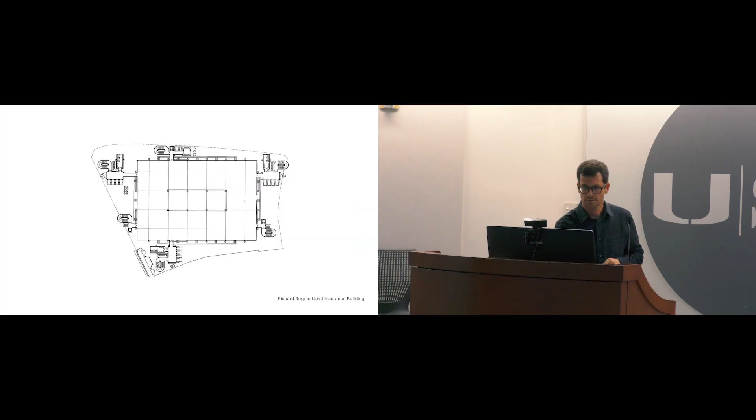Now, this is a project, probably you know Richard Rogers, the Lloyd's Insurance building, which we like a lot. When you look at it, you see it has a really clear structure, which we like very much. And then he's taking out all the elements which might, let's call it, destroy the ground floor. And this is something we also tried to do here, because we were quite limited in terms of the dimension of the plot. We said, okay, in terms of sufficiency, we want to do as many apartments as possible and make them as little as possible.

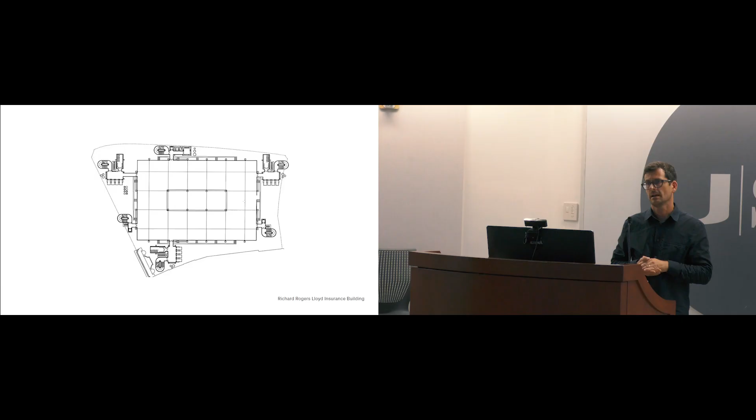And so finally, I go to the next one here, we decided to make 8 duplex apartments. So they have 2 stories each. In the first 2 floors, we have 4 in a row. And then on the second floor, we have another 4. And now, why did we take out everything? First of all, we were interested in having a rigid structure. So we could build 8 times exactly the same floor plan, which was very good for the cost, but also helped us to have a strong concept.

And then, secondly, to take out all the elements which don't have to be heated. We don't need a warm elevator. We don't need a warm stair, and we don't need any circulation spaces. These are all the things we added on the main volume, and somehow the volume became much smaller, and with these additional elements, it started to connect with the surroundings.

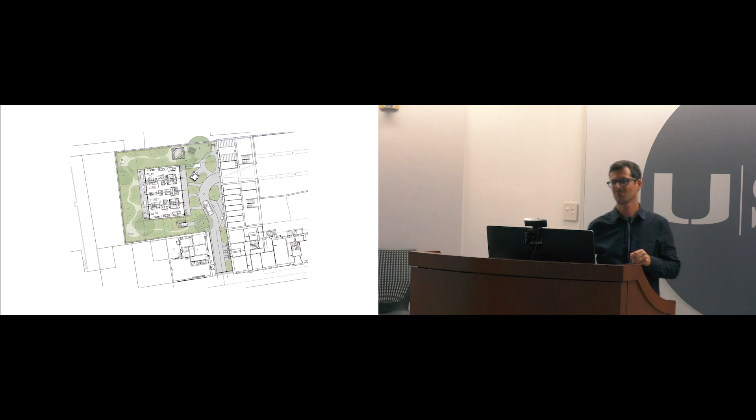And then you see here the entrances to the different apartments, the access to the stair for the second level, and the elevator in the back. Here, finally, we have a ramp for the wheelchairs. And it's quite interesting what happens. Not many people go back there. Maybe there are some crazy architects who want to knock on every wall. They go there, you know. But every, let's say normal person, wouldn't go further than this point here because you feel it's too much privacy.

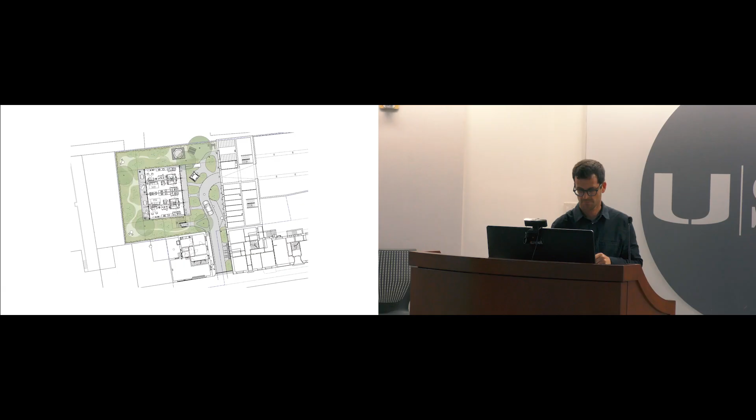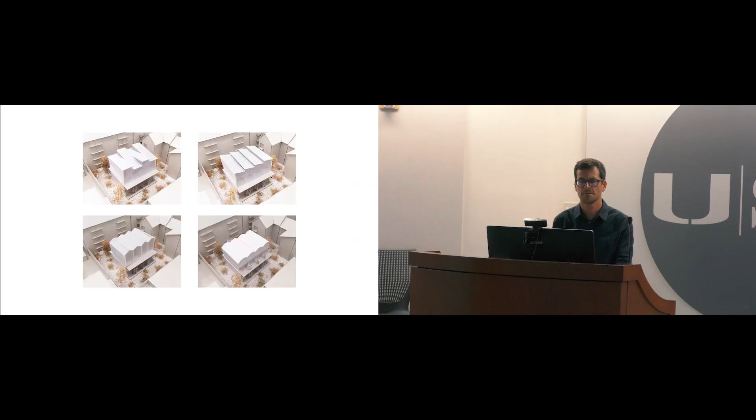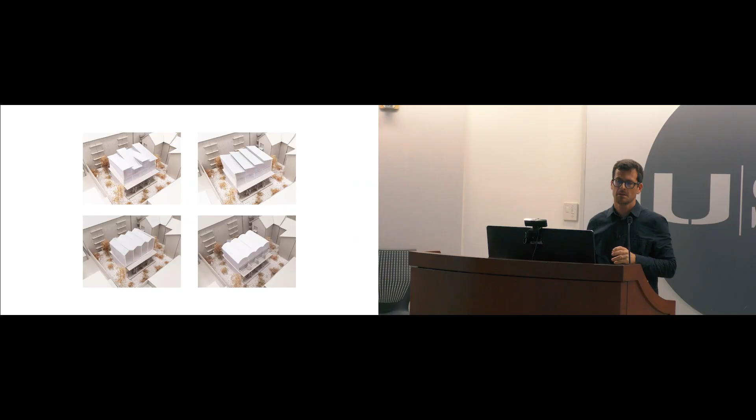So here you can see different model studies. Fabio and me, we still work a lot with models. We love 3D, we do all these things, but for us to develop it, and also for the clients to have something to look at, to touch, to walk around, the model is still a very good element to develop a project.

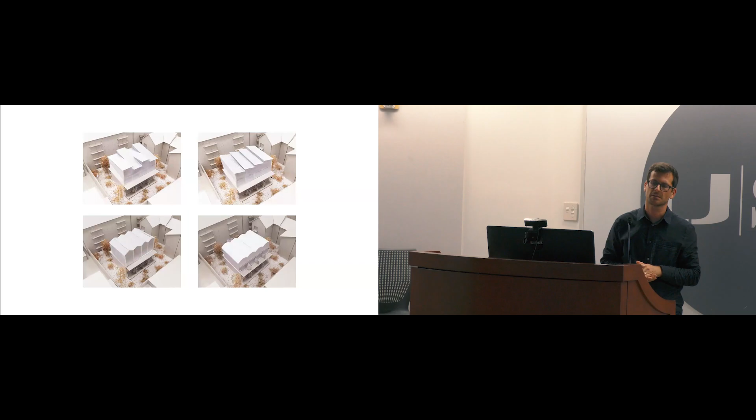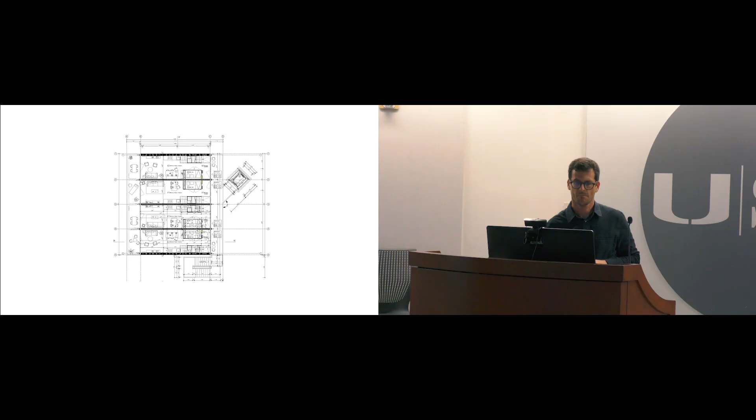Now let's go to the ground floors. As you see here, the four same floor plans, they're always mirrored, two and two together. And the elevator or the stair brings you up to the second floor, and to the back. I go quite quickly through because I have a closer detail to explain everything. And this is the upper floor of the apartment. So now let's see the detail.

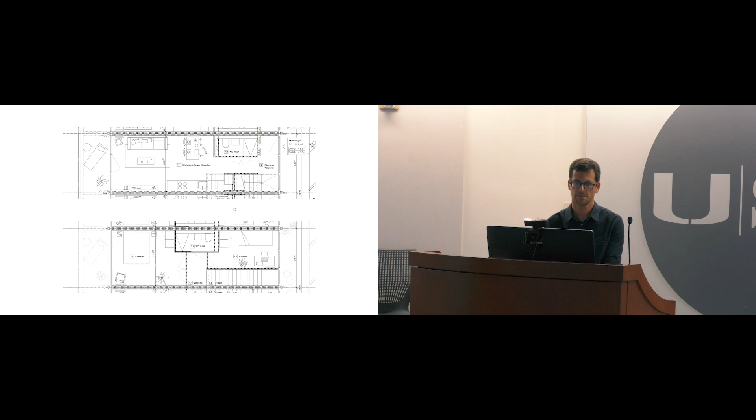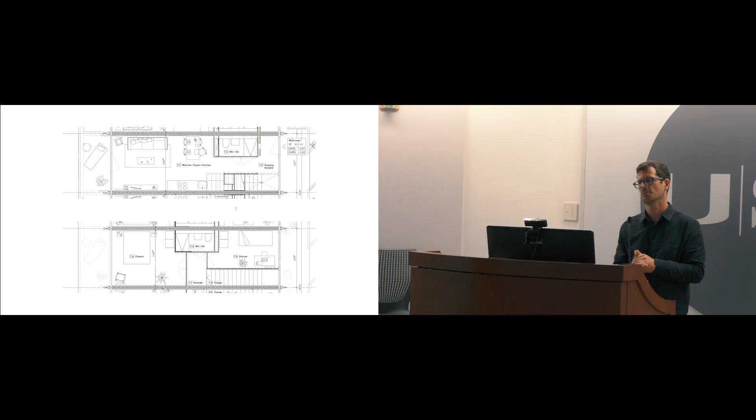To be honest, it was quite a challenge to build such a small apartment because, as you probably know also here, there are so many regulations you have to follow, and so on. But let's go through. So you start your duplex flat in a small place here. You have a small entrance area, a wardrobe, and then you have a wooden box where the toilet is.

And this is already one main topic, because in terms of regulation, they need us to make a toilet which is accessible per wheelchair. But this one was totally not, it was too small. And there would have been no chance for us to build this big toilet in this ground floor. So we found a solution, which we think is very nicely done, because we have a double door here on the toilet, and when you open both doors, they close to the wall of the stair here, and you reach the dimension of the toilet which you need.

And so this detail shows you how we work with the laws, how we try to find solutions to get the best out of it. From there now, you can walk behind the stairs, and behind the stairs there's a small kitchen. It's a bit covered from the entrance, and then further on you have an eating table and a living room. And in the back, you have the outdoor space. And the good thing is, with this box here in front and the stair, even if people walk through, you're totally private in here. And that works really well.

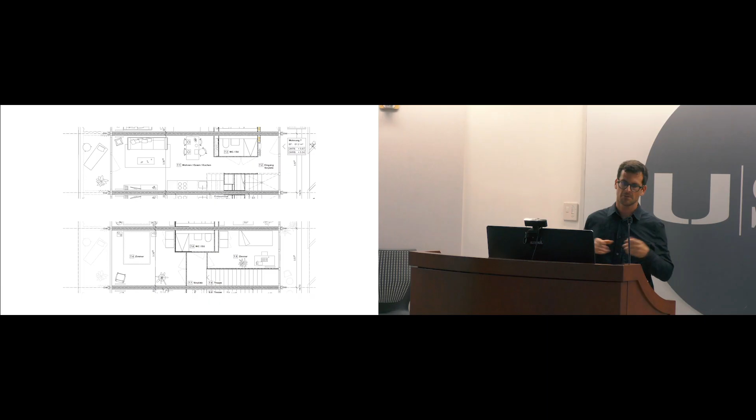Then when we move up here, we have the stair leading up here. You come to the upper floor. So here we have a double space, which gives some generosity. And you enter, you have two sleeping rooms, kind of a master bedroom, where you have a double door, which also generates some nice views to the whole flat. You have a smaller sleeping room, and you have a bathroom.

This is the section. As I said before, these walls are really important. You will see further on. We kept everything from the former use as a garage on the wall. Sometimes there are paintings, sometimes there are old tiles, you know, and we left everything because it's part of the history. We wanted to show what happened there, and we bring in just a new layer. We don't want to hide it. And this is what interested us.

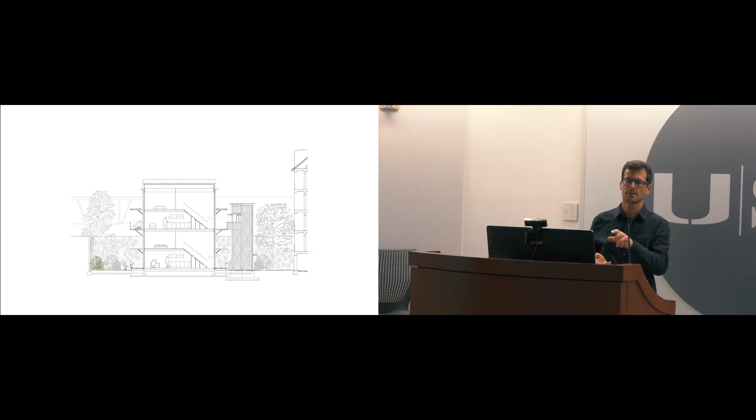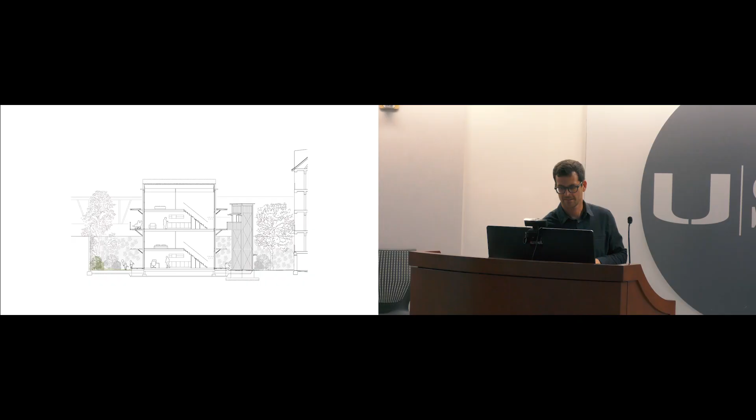Then another thing, which is quite visible, we do not have a cellar in this house. We just have small foundations, because as we also transform the existing building in front, they have a big cellar there. We said, okay, let's reduce the volume. Don't make any unnecessary cellars. Just put all the installation we can to the front house. And the garage and the storage room are in this building here. There's an old garage which is not used anymore, so we could use it.

When we move into the interior, like you saw in the first image of this shelter for the animals, these are also raw materials. And we like that very much, to have an honest way of designing, honest ways of construction, just showing the concrete slabs, the wooden walls we put inside, the windows. And what is very special here, we had an idea of doing all the installation not in the wall, but on top of the walls.

For our project leader, who was also doing the construction site, it was a lot of work because he had to measure everything in great detail. It was a lot of work. But finally, in case they have to change something, you never know with the life cycle of these elements, it's very simple to adapt the building to new questions.

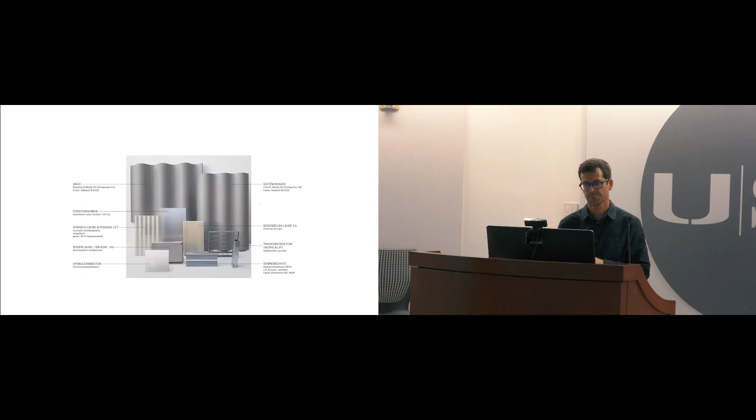Now let's move to the outside. What we followed inside, we also used on the outside. These raw materials: we had galvanized steel, which we used very visibly, and this is helping us to show the inner structure on the outside also. We have these fiber cement plates, which we clad on the facades. We have aluminium windows and wooden planks on the balconies.

And we heard stories that they never use the curtains. And they go even so far that when they have friends or guests for eating, they share their furniture. They just ask them and they use it. It's perfect.

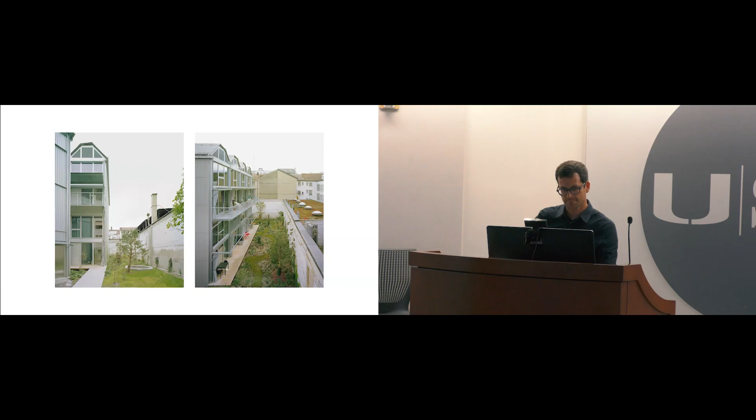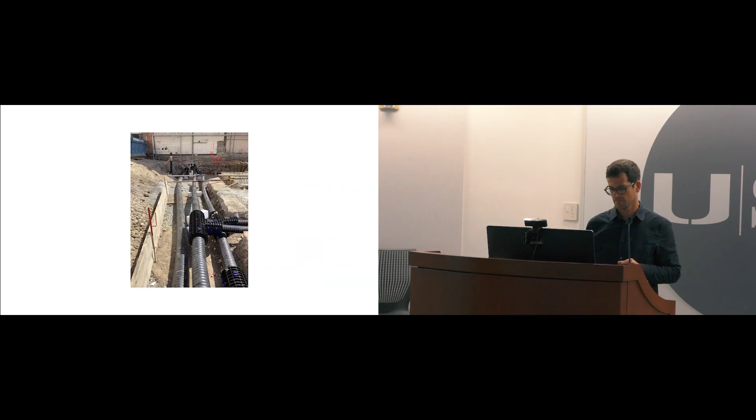Now a few pictures of the construction. First of all, demolishing the existing car garage. These are the installations from the neighbor building. Here in the back, you see the piles which we left. The foundations for each structural wall. And here you see, these are the old garages. Now the apartments have a storage room in this garage.

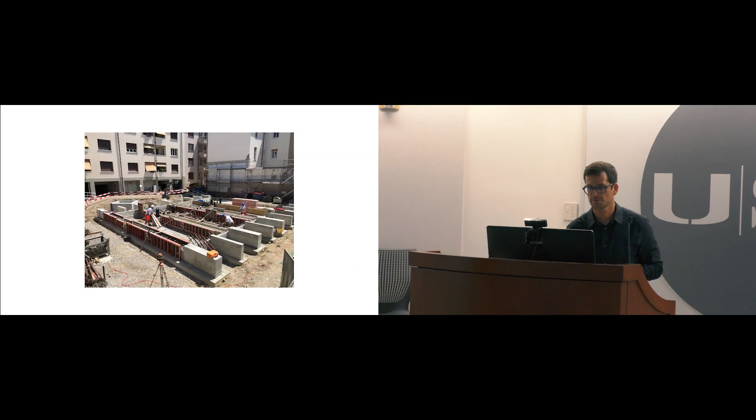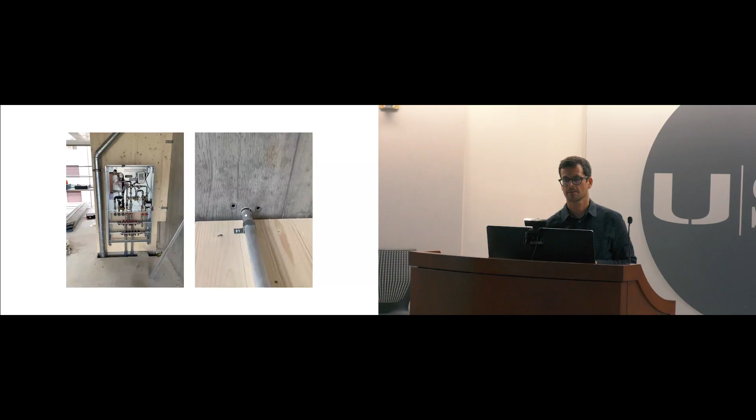So now you can imagine what kind of work it was to measure everything inside, super precise, because before you put this wall, you had to do the ceiling, you had to measure in everything so that finally it works here. And this is the backyard, the green courtyard.

The next project I would talk about is one of our first projects. It's a project that came from Fabio's family. His father and his mother asked us. It's a long story. We started with a typical Swiss box, very minimalized. And then there was some crisis in terms of the housing crisis. So we stopped it. And looking back, probably it was the best thing that could happen for us because of that stop. We started with a really small project. We made a bathroom transformation, and we could really find our own way of designing architecture.

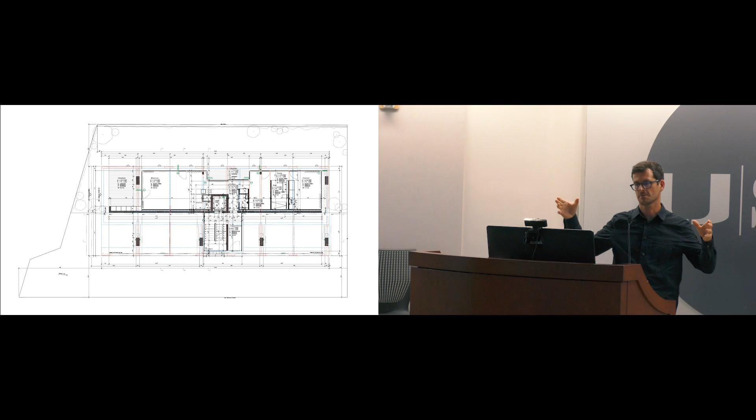And as I said before, we're really interested in reading the building and construction law very well. So we found the passage that said: whenever you take these car parking volumes, which are not the main volume but a side volume, and put them into the main volume, you can increase your main volume by a certain amount of square meters. And this idea was initial for the whole project. And from there on, everything came together, not simply, but it came together very well. Let's call it like that.

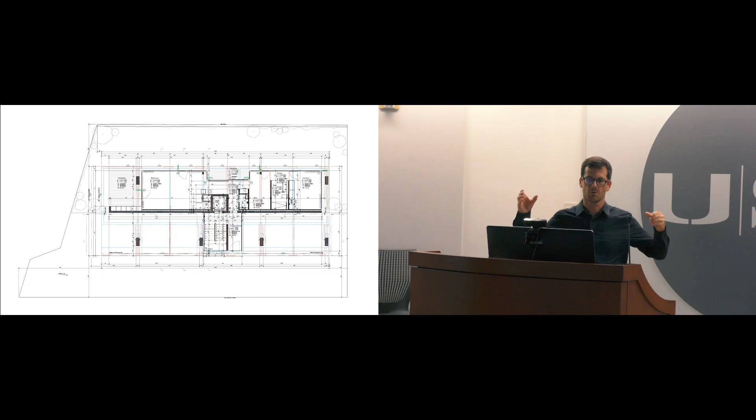Because we decided to have a public parking under the building here, all the parkings here. And then behind the parking, we had a really massive wall. Behind it, we had a private apartment. It's almost a loft apartment. You have a view through the whole apartment. And again, here we have a wall which makes it private, and it's a very nice space in here.

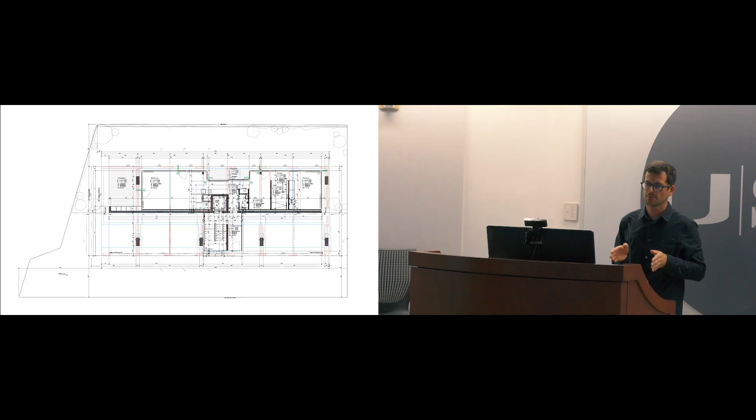And here you see the structure. You see these pillars or columns, which are load-bearing; they come down, and they're defined by the width of the car parking, which we had to fulfill. So they are going, as you see later on, through the whole building. When you enter now, you can park your car here, and you can take the public stair going up, or you enter the apartment in the back.

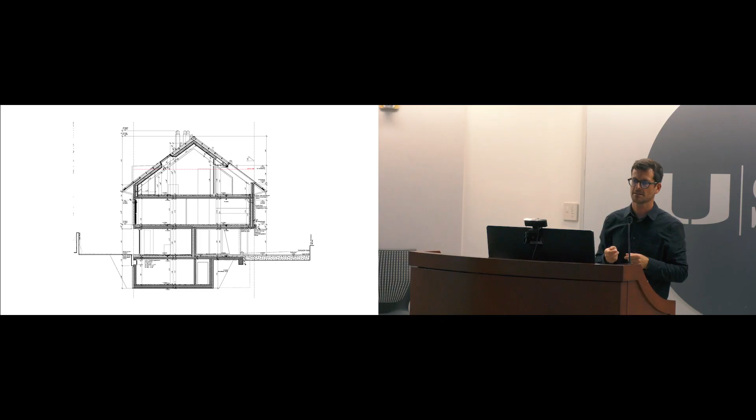And when you see now this picture, before I said we like to transform certain elements, but we also like in our work to take traditional elements and work with them. Take a traditional roof, whatever, and transform it into something in this generation. And here we were really orientating on a very traditional house with a big roof going over the facade, with water gutters going down, very classic, but we're trying to give them something special in the design.

So the building is almost hovering above these steel elements. And to give them more privacy, we decided to give them a nose. So the nose goes about 60 centimeters further out of the facade. People who live there can put plants on top there and have more privacy when they sit behind the facade. Here the nose is quite well visible.

This is a detail, the pillar, water coming down, ending up in this additional element of the ceiling and going inside then. When we look closer at the detail, small elements which we think help a lot to structure the building. We have this ceiling above ground floor. And then we have this filling in the facade of the first floor, and it goes back about 10 centimeters, and the upper floor is coming out again. So these are small textures which help us to structure the building, and it helps to orientate it horizontally.

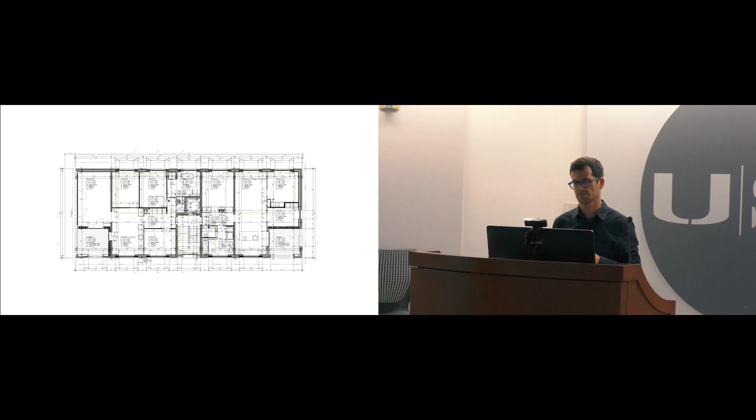The idea was to have as few corridors as possible, to have more of a room to room experience. It was not 100% working here. We had to make a small entree, but then when we enter the apartment, you have the rooms, bathrooms, and then the central kitchen from where you access sleeping rooms, living room, and the loggia. So with this trick of putting the parts into this main volume, it was very well possible to have two nice and good apartments on each floor. Kitchen, then the loggia or the outdoor space totally in wood. That's it.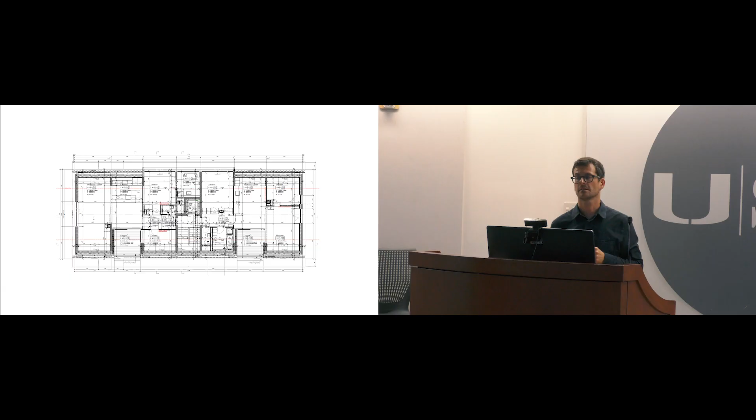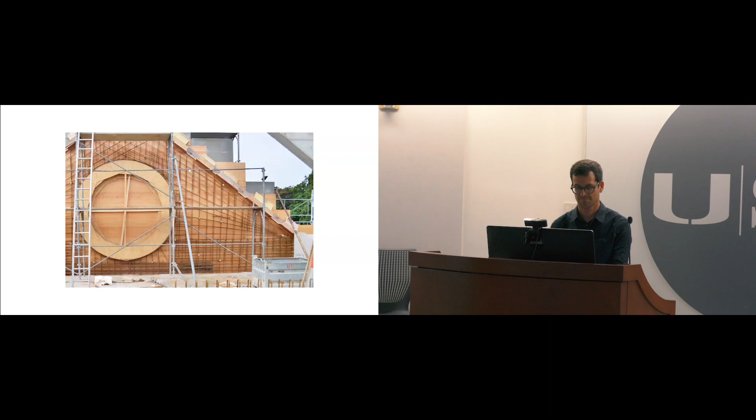And now we go to the attic floor plan. What you see here is the same structure, but we could lighten it up because there was less weight. The walls become a beam and still hold the roof, and this is going through. The outdoor space cut into the roof. Now a few pictures of construction. This is the round window which they built for the concrete. You see all this steel which they had to bring in there.

And as I said before, this traditional element, here we were working also with these shutters. Shutters not in terms of closing down, but sliding shutters. This helped us to give them some warmth in combination with the roof, a very traditional roof. And the nice thing is also, especially here in this loggia, you have the possibility to close it totally and you have a private space to sit outside.

The next project is called Haus Cesana. It's also based in Basel on a hill where you have a beautiful view. It's really amazing. And these clients, we see them every year. It's kind of a tradition. We meet once a year for dinner, and it's still nice to talk with them about how they feel, how happy they are. So this is also a very nice sign: when we finish a project, we still have a good contact with them.

So that's the house. It opens up to the landscape. And as you see, the garden, it's an element of stairs and platforms going down from the house to the garden.

This is the situation, in so-called Bruderholz. You have here the existing house. It was quite an old house. Philip could buy it from his family. You see a lot, the garden was quite wild. And like I said before, there was not really a connection between the house and the garden because it was about 1 meter above ground. The inside was also quite old, in an old way.

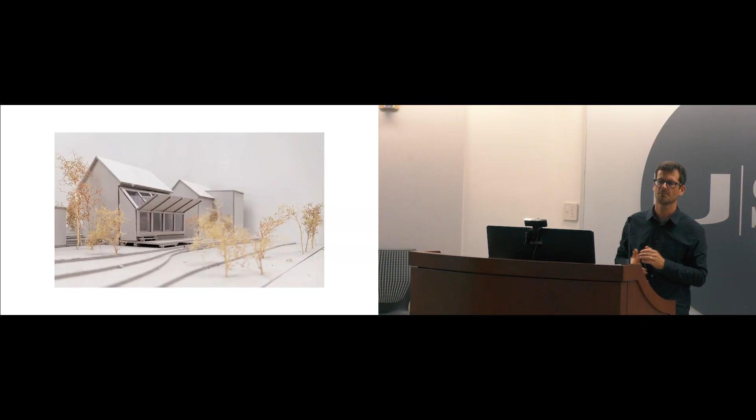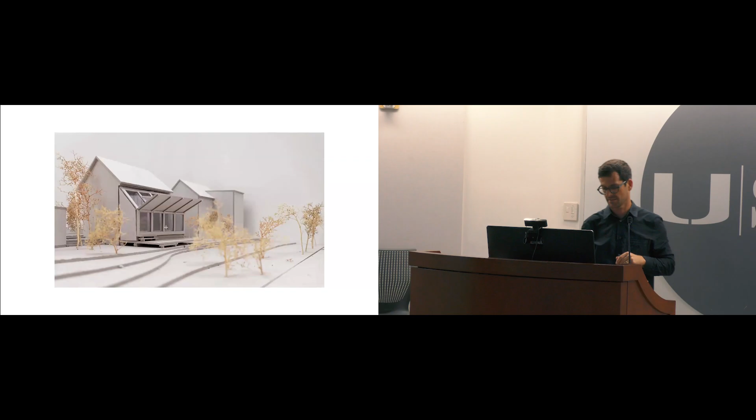And then we have this roof here, which is covering the outdoor space from rain, from sun, and giving a really nice view from the inside to the nice landscape. The interior view.

So here's the ground floor plan. As you see, that's the existing one, and then we took out the whole facade from the ground floor. And what we liked here was this honest way of saying, okay, where do all the forces go? And we created a very massive pillar. Probably we could have made it thinner, but we wanted to have it as a central element where the steel beams end up. So there are the forces going down and on the side. On the right side, this is the addition in a wooden element, combined with steel structure.

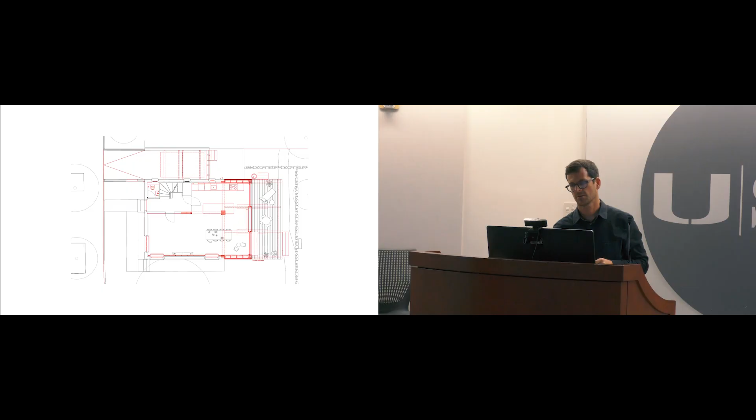When you enter here, you have an access. Here's a living room, eating room, and then there's a central kitchen. The people really like to cook, so this is a cooking island. And from there, you have a few steps down to the platform, and then 2 steps down to the garden. Here the section shows the same. As you see now, we have smaller windows in the roof, and this roof here opening up to the landscape.

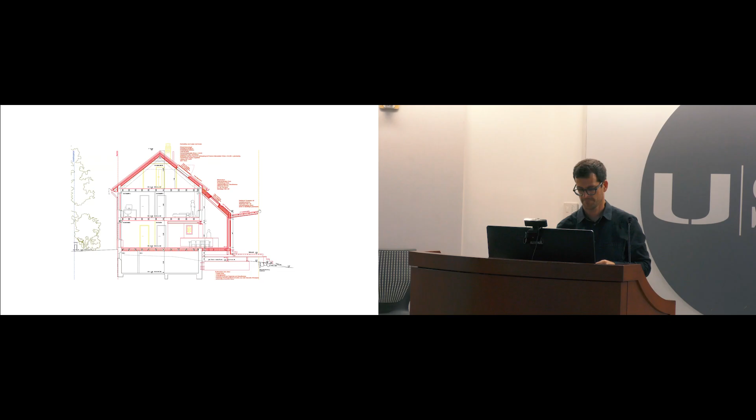On the left, the view on the platform to the inside. Here standing in the room. And what we were fascinated working on was this mix between inside and outside. So you're inside the building, but you still feel the old facade from the outside with this very rough surface. And that was fascinating for us. And then in combination with showing the different materials, bringing down the load and showing it.

Also here on this extension, you see, first of all, it was a steel structure. Then we put wooden walls and wooden ceilings on top of it. Even this diagonal element was part of the design. As I said before, very often the structure is for us a part of the design. It helps us to design the house. The view from the kitchen out. So now you can imagine the view here. It's amazing.

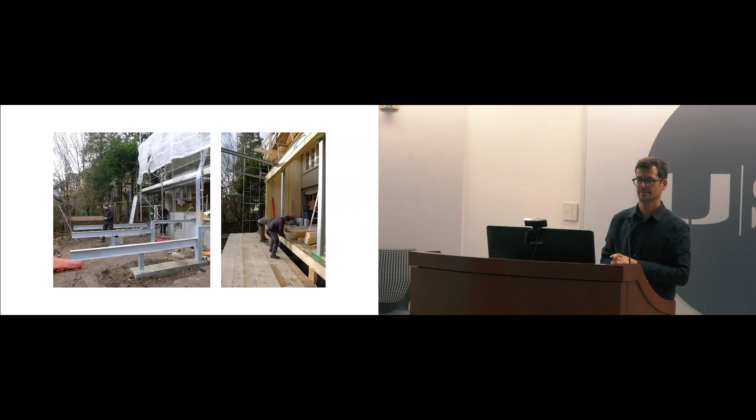And this is also a funny part. This is the bathroom in the upper floor. That's the old window which was existing there. I mean, the hole was there, we just put a new window in. And now it's really nice that you can look down to the kitchen. There are some pictures of the construction site. Small foundations for the steel structure, and then this wooden element on top.

Last but not least, they had an existing garage on the side. But as you can imagine, cars became bigger over the last few decades, and it was really too small. And as you see, we took down the roof here. You see the facade here. It changed. The roof was attaching to the facade. There were old windows and so on. So what we thought would be nice was to keep these old elements, not take them away, just to show the history of the house. So we left this wall here, and we put a new steel roof on top.

It's a smaller one, but it's enough to have the car covered from snow and rain. And you see here the old structural element, where the wall was touching the house, the window which closed because the kitchen was behind. And here the same. In terms of the color, it's almost the same, but you feel the addition and the extension very well. The water going down here, so we also extended it. We went down here and we made it drain down.

The next one is a housing project again. In terms of the size, it's quite similar to the house in Baselstrasse, the second project, but it looks totally different, you will see. That's it. People say it looks like a ship or like a temple. The way we came here is quite interesting. This is the situation, how we found it.

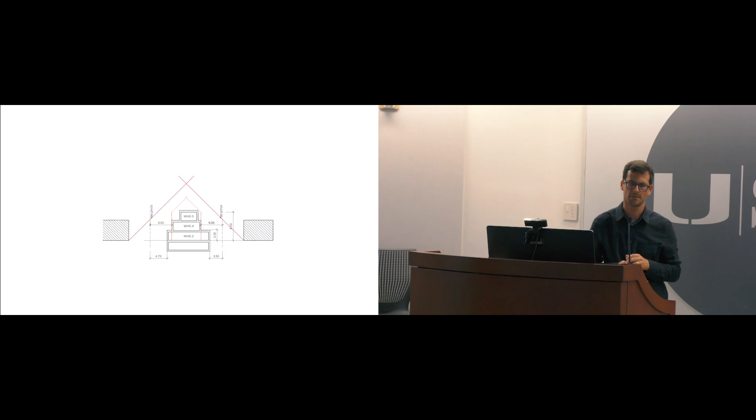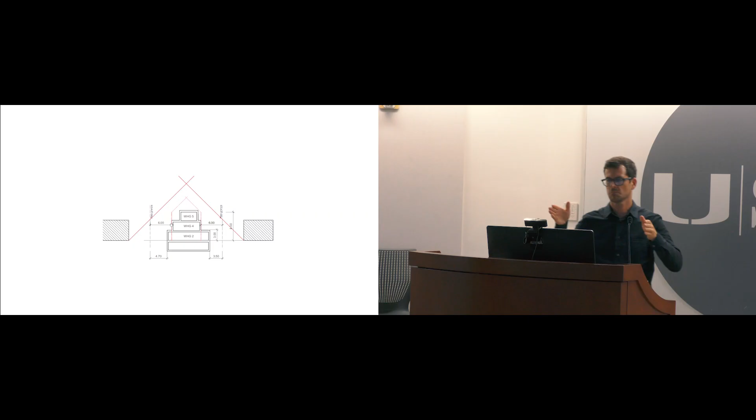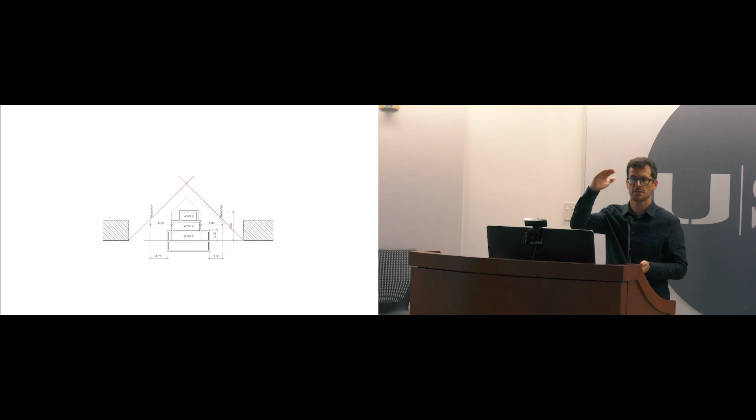So we started again to find out what we can build, what is possible. As you see here, we had to keep a distance of 6 meters of the main building from both sides. Then the attic has to move in a certain amount of meters. But in this town, there's a law that whenever you build an element of the house which is not higher than 3 meters, you're allowed to go all the way to the border. That means we could really build a 3-meter house at the frontier to the neighbor.

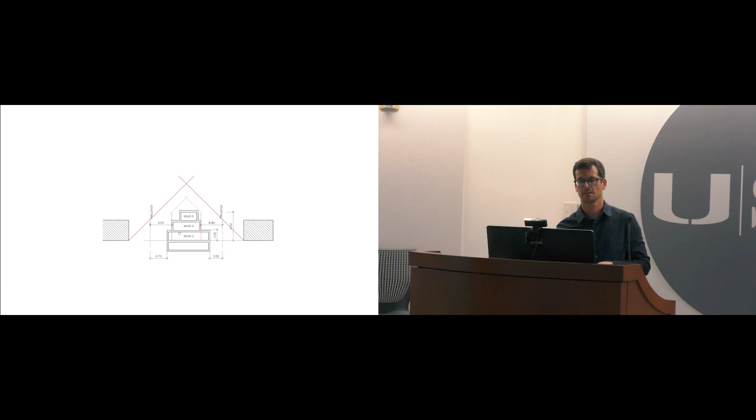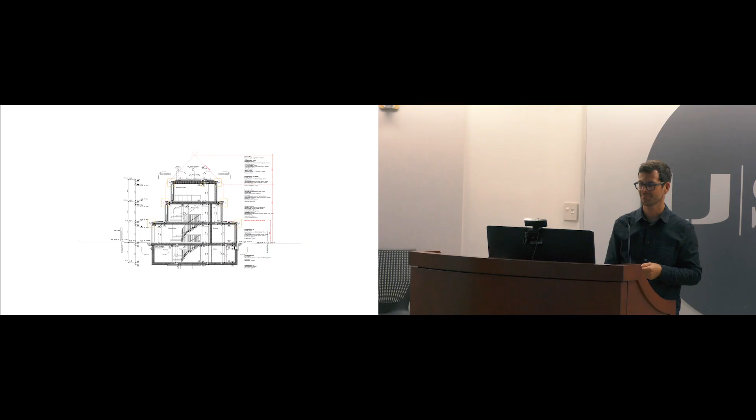But we didn't want to do that. But it helped us to maximize the square meters we were allowed to build. And with this law, suddenly it came together that we had this shape of house. This is the view. As you will see, the balconies are always on the short side. We have 2 apartments per floor, and each of them has on the short side a nice big balcony or a terrace.

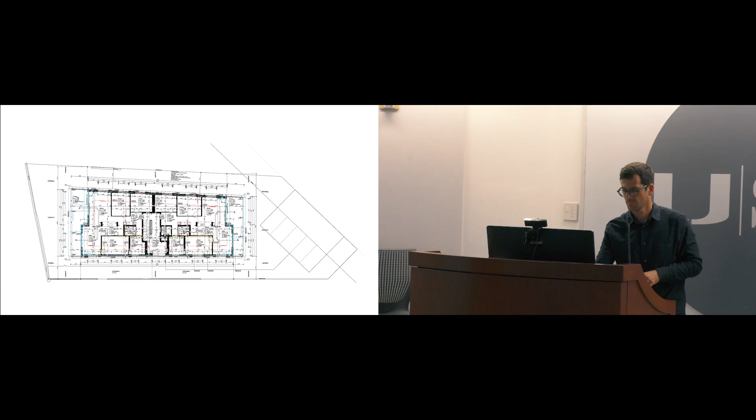Now, when you enter the site, here's the road. We have some public parking here, and then there's a small footpath going back, leading to the middle of the plot. The central staircase gives access to 2 apartments on each side.

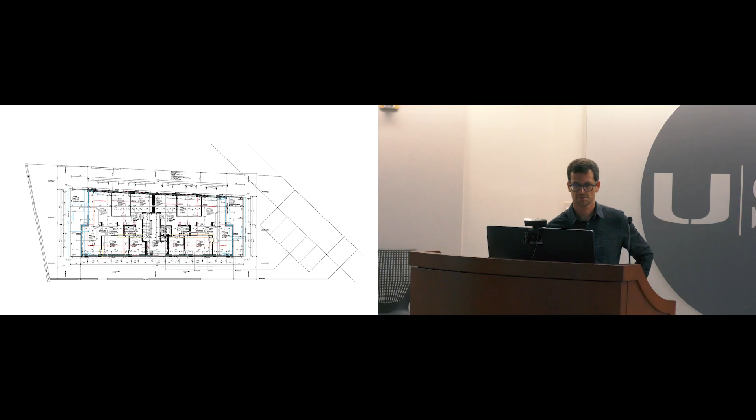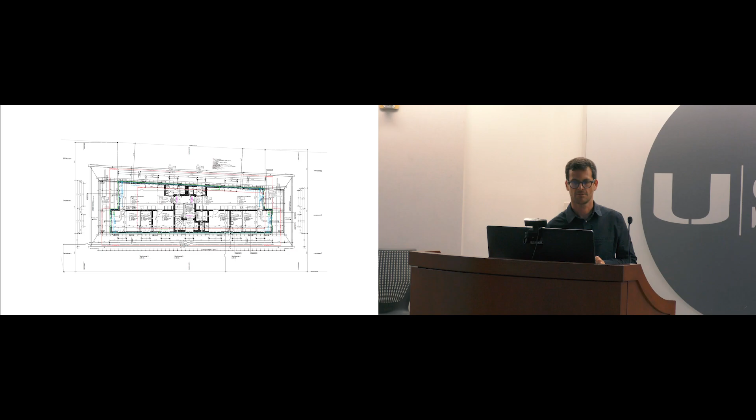This is a view from the upper floor. As the apartments were quite small, we had to find a solution not to spend too much space on corridors and stuff like that. And here we got it without a corridor. You enter, there's a wardrobe, and then you have 1 open space for cooking, eating, and a lounge. From there, you have 2 bedrooms with access from there, and they share a common bathroom. And on both sides, you have these big terraces.

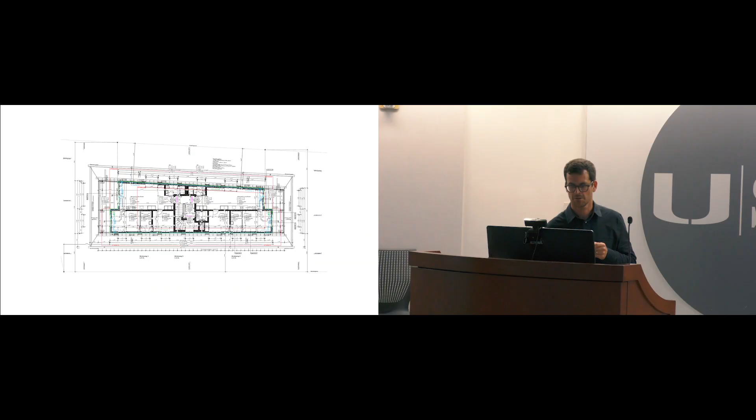About the facade, the situation is very green, with big trees, and we proposed to make a dark building which integrates really well in the surroundings. The construction is a combination: the ceilings and the core are in concrete, and the walls are out of wood, in combination with some steel structures. And now you see here what we wanted: to define the horizontal of the building.

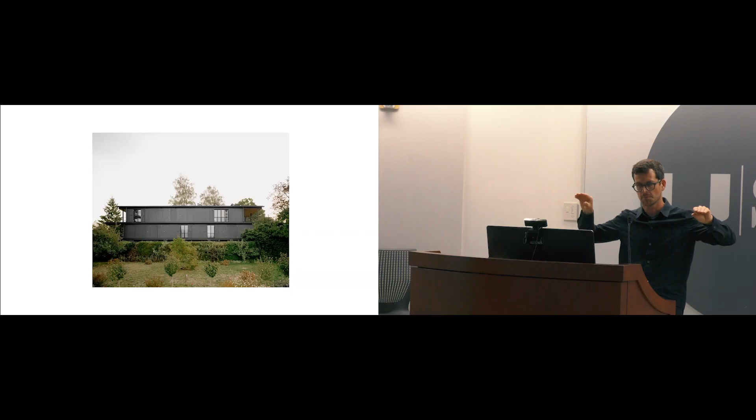We had big discussions because, to be honest, we were not allowed to make an overhang of the roofs. You see here, that was impossible. So then we found out that there's no rule. Sorry, I talk a lot about rules, but we really try to find a way around, so that we can build what we think is important for the house. And to all of you, sometimes it's really worth fighting for your ideas.

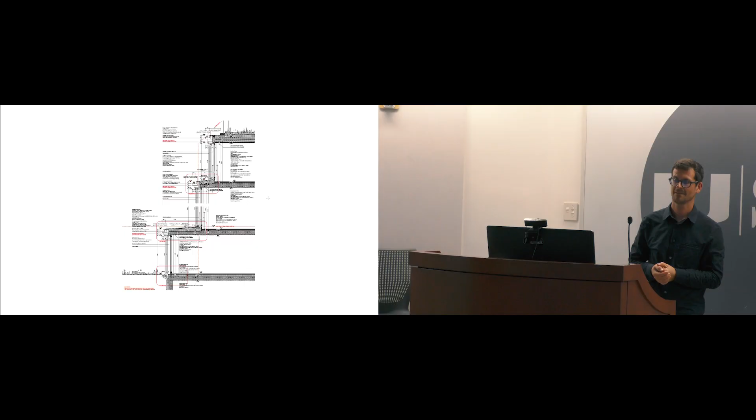What we found is that for these water pipes, there's no rule that says how wide they are allowed to be. So we defined it; we made a mock-up in the model. It's about 50 centimeters wide, and we put them on both sides of the house. This helps us give the house a structure. Beside that, it not only helps to orient the structure, but it also brings a human scale to the building when you walk there.

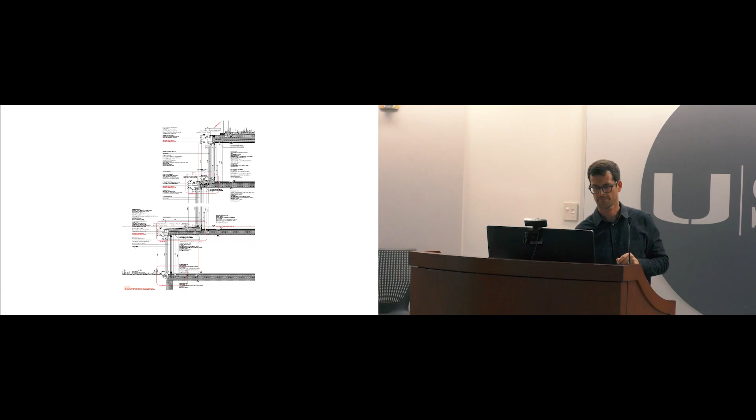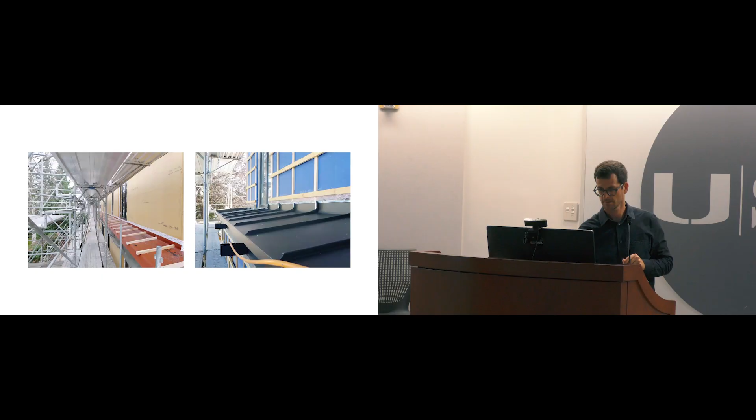There's the detail where you see the concrete ceiling, the small metal roofs, water dropping down here. These are pictures of the construction where you see the wooden walls. And here you see how it works now.

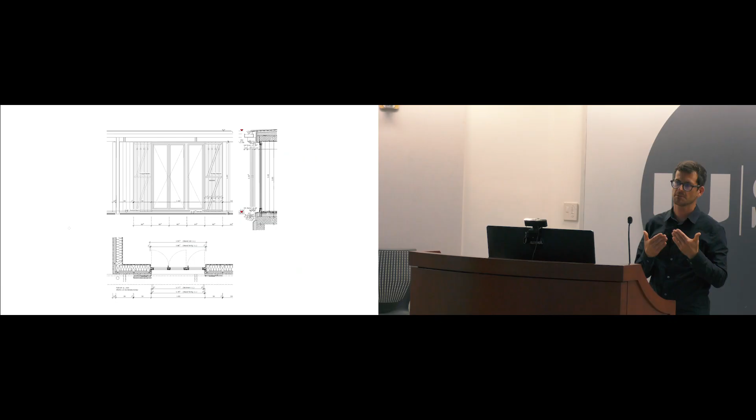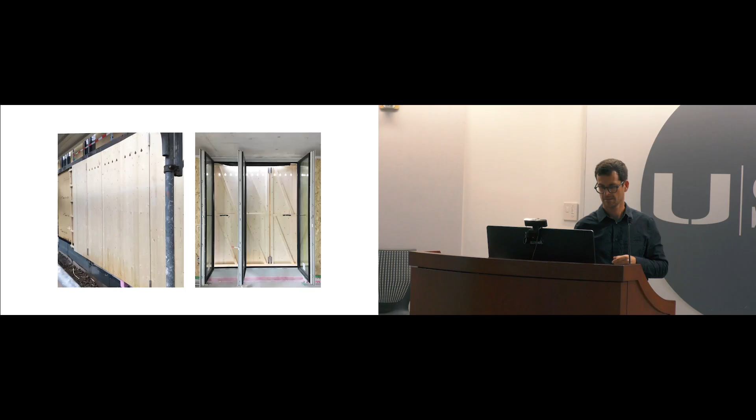Now, here we have shutters again, a very traditional element. We wanted to use it there because we think on this facade, it gives a certain deepness. It's a playing element, which we thought might help a lot for the house. There was a mock-up on the site where we tested everything, if it works. And the client was happy with it. And it looks now like that.

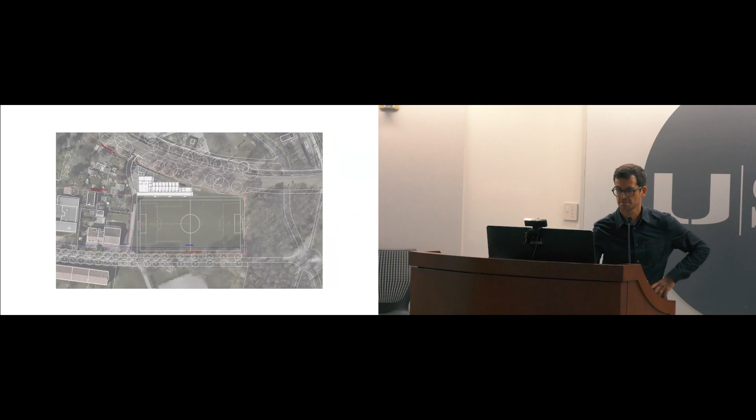Here you see the situation. The situation is very special because it's actually in a nature area. You are not allowed to build any houses there, and if you build something, you're not allowed to dig into the ground, and it has to be some smaller elements. So housing, living is no chance. Because in this area down here, they're going to generate drinking water for the city of Basel. And as you will see later on, there's one huge pipe of water. It's, I don't know, maybe 2 meters high, going underneath our building and delivering water to the city.

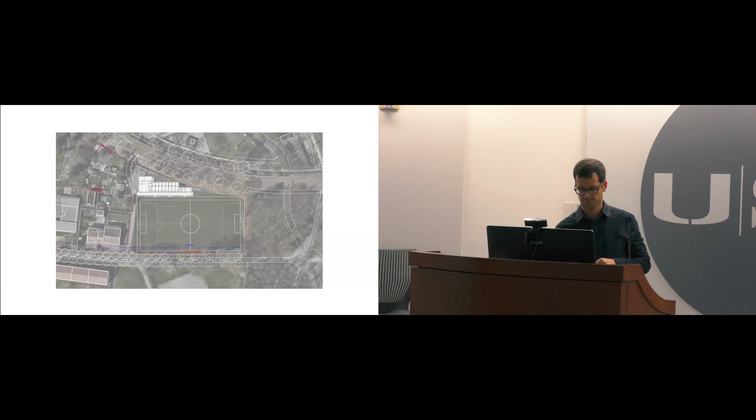Then in the back of the parcel of our plot, you have tracks from the train, which are on a small hill. They're leading there. The existing field, and this generates this very specific triangular shape of the parcel. The access is from here. You park here, or you come by bicycle, you drive back here, and here's the access. Here you see the existing containers. It was a bit of an improvisation, and in the back, the old track for the trains.

So now, all these elements which we had to follow, like don't dig into the ground, make a building which is really subtle, which integrates to the background. Let's go back here to this greenery. We decided to make kind of a pavilion. It's a one-story pavilion, and we thought, okay, what can it be more than just a function? And we found out, hey, let's create a platform which is connecting all the different functions and which also has the possibility for gathering people.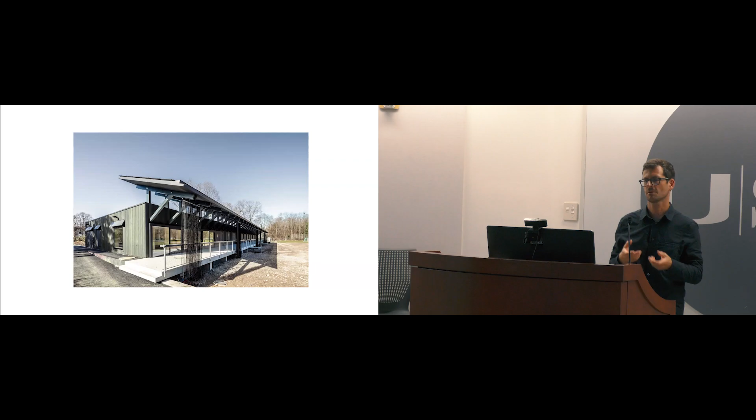So imagine, at the beginning I talked about the handrail. You remember maybe? So here, we also use the handrail, but it's a really thick handrail. So the nice thing is, I have a friend, her son plays soccer there, and she sent me a picture and said there was a drink there and a bit of pommes frites, and it was all put on the handrail, and she could watch the soccer game. And this is exactly what we were interested in, it gives more use.

So then, to finish this platform, we decided we want to cover it. So this is this very big roof. I will talk to you later on about the construction, and it creates this outdoor space. As you see here, you have 2 steps going up from the public path or a ramp, and then you're on top of it.

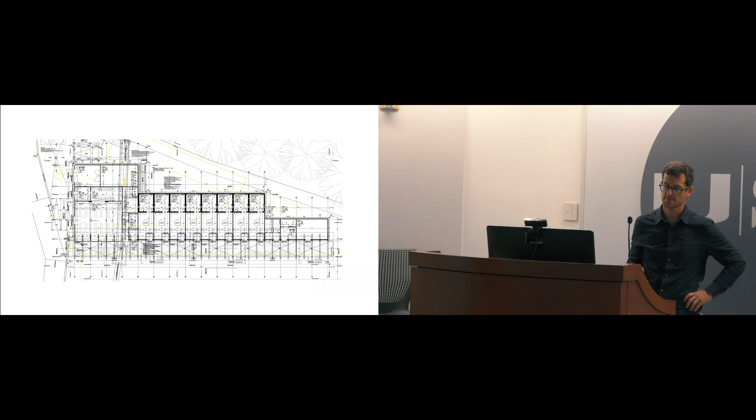Here's the ground floor, and sometimes you have to be lucky, but this triangular shape really helped us to develop the building, because first of all, at the beginning of the building, we wanted to have this public function with the clubhouse here in the corner. You have the kitchen in the back, and some storage room further back. So this was the biggest element, the deepest one.

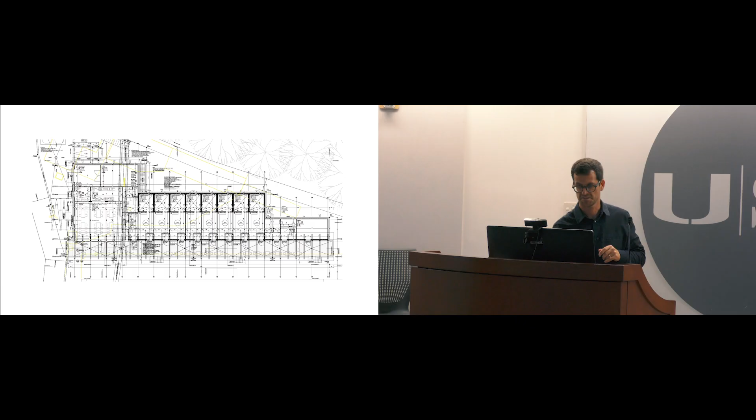After that, we decided to have the wardrobes. So it's 8 wardrobes, exactly the same. These are this one here. And then at the end, there are some wardrobes for the referees and some spaces for the people working there.

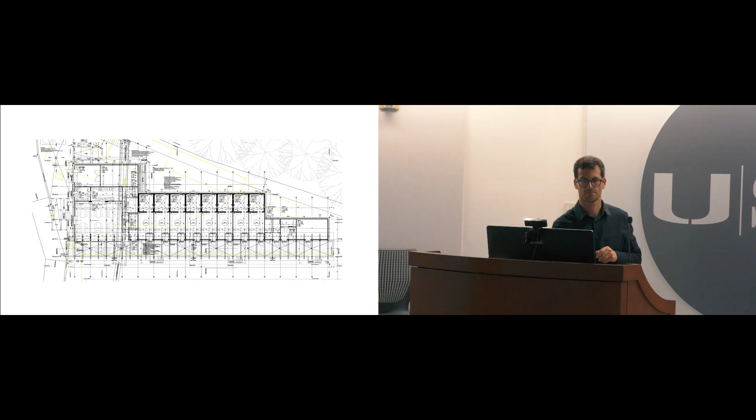Yes. Maybe here you also see the grid. The grid came from the size of the wardrobe, and that was going through the whole building. This structural element from the walls, going down to the foundations, going further on to the structure of the roof. Here are the sections. You see now here this really big water pipe underneath the building. That's it.

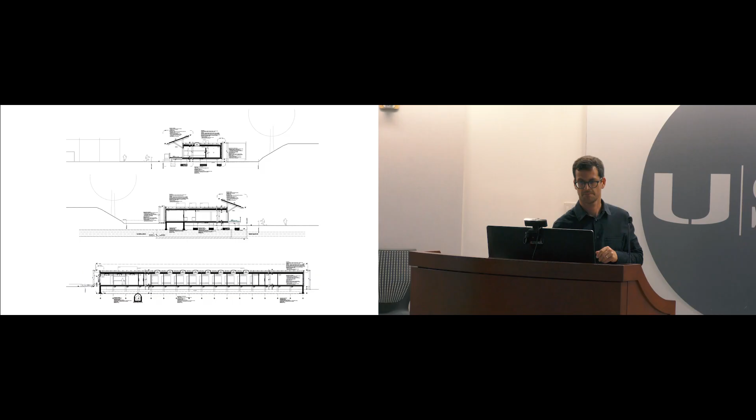Then it was also quite nice in Switzerland, or in Basel, we have standard elements to wash the shoes, but we could convince the client that we want to design something else. It didn't cost more, it was the same price like a standard element, but it's very nicely integrated to the platform.

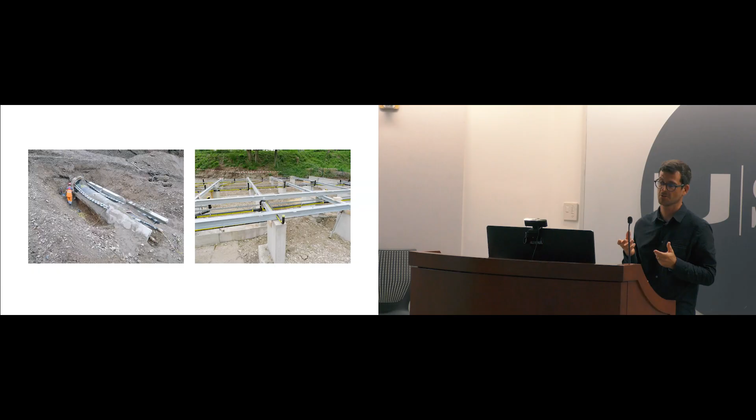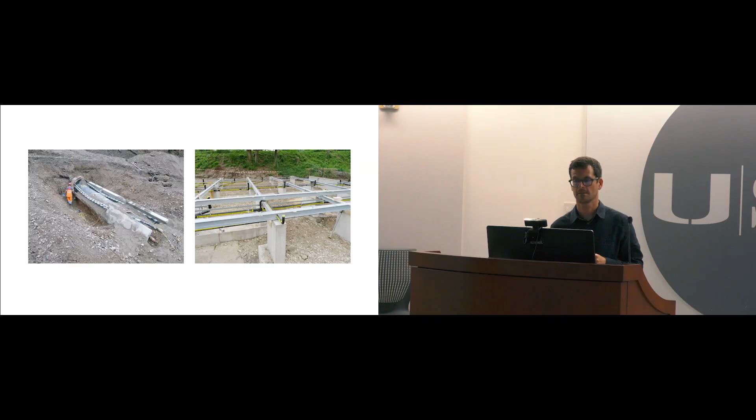Here you see, now imagine this is a person working here, this is the water pipe. On the right side, these are the small foundations we had to build. Then there's a steel construction on top. And what you see now, all this black, this is the canalization. And all these pipes, they had to be protected or observed with a cable in case of damage. It would give a sign to the city and they would repair it directly, because nothing is allowed to drop down here.

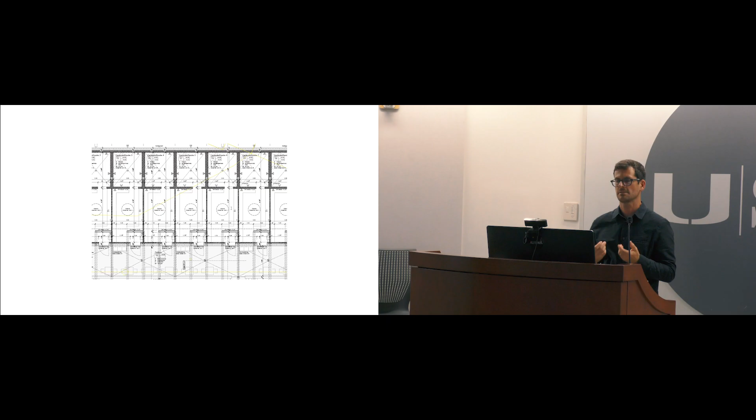If you go further to the detail now of the ground floor, we have this platform in the front, which is out of concrete. Then we have the wardrobes. These are massive wooden elements. And what we also like here with these elements, like the main construction, the main structure is what we see finally at the end. We don't cover it. And in the back, you have these shower elements. They are also in concrete.

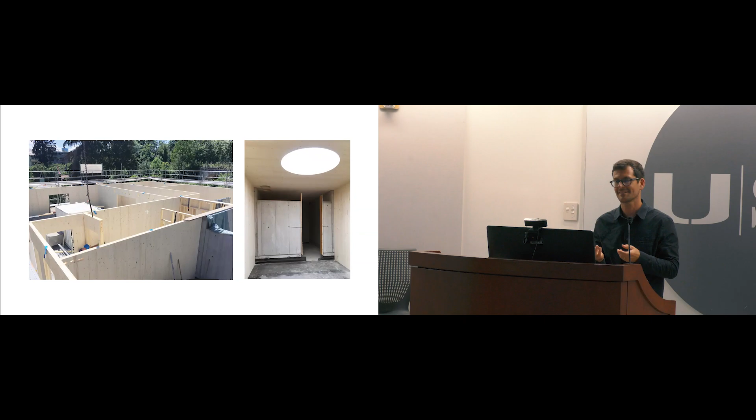Here are some pictures. And it's for us really fascinating because we had a lot of discussion with the client. How does it work? Do these young football players accept that it's wood? Sometimes when they lose a game, they might be aggressive and frustrated. But honestly, until now, they were really taking care of their building. Probably they see that we loved to build it, and maybe they love it as well. So this is how it looks now, and it's still in perfect shape.